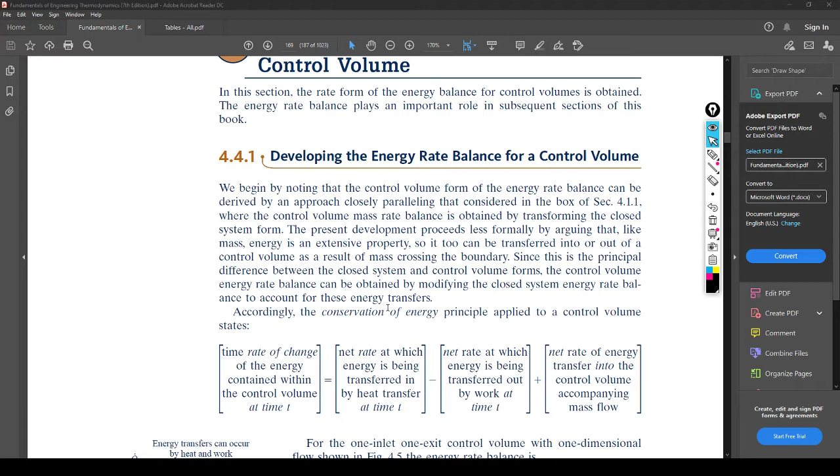So it says, we begin by noting that the control volume form of the energy balance can be derived by an approach closely paralleling that considered in the box of section 4.1.1, where the control volume mass rate balance is obtained by transforming the closed system form. So essentially what it's saying is that we are transforming the original one, Q minus W is equal to the delta, the change in energy, right? That equation that we have worked with before. So I'll just write that out if I can.

Q minus W, so the heat transfer minus the work has to be equal to essentially the change of energy, right? But the change of energy, if you guys remember, breaks down into kinetic, potential and internal energy, right? It's the exact same for this chapter as well. Except that in this chapter, because we have a control volume, not in many cases do you have to deal with potential and kinetic energy, but there are times when it is added. And in control volumes, you'll see it more often than in closed systems.

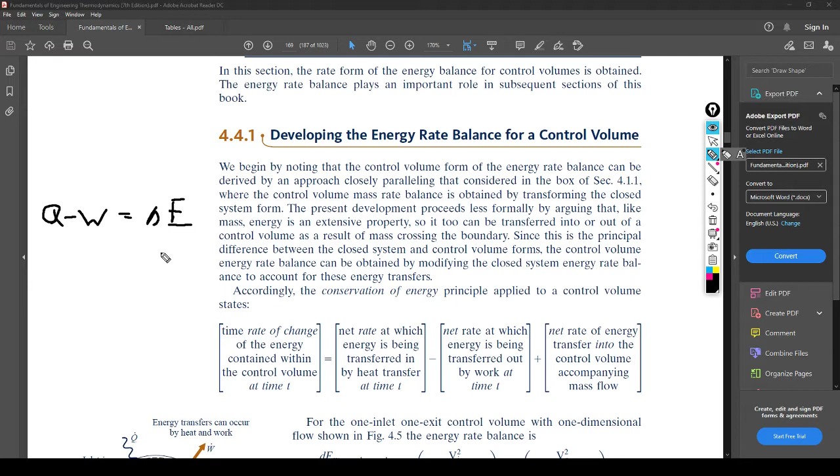So remember, inside of this delta E is the change of internal energy, the change of potential energy, and kinetic energy, right? And we'll show that equation in just a second, the full one. So let's read this part.

It says the present development proceeds less formally by arguing that, like mass, energy is an extensive property, so it too can be transferred into or out of a control volume as a result of mass crossing the boundary. Since this is the principal difference between a closed system and a control volume, the control volume energy rate balance can be obtained by modifying the closed system energy rate balance to account for these energy transfers. Accordingly, the conservation of energy principle applied to a control volume states this.

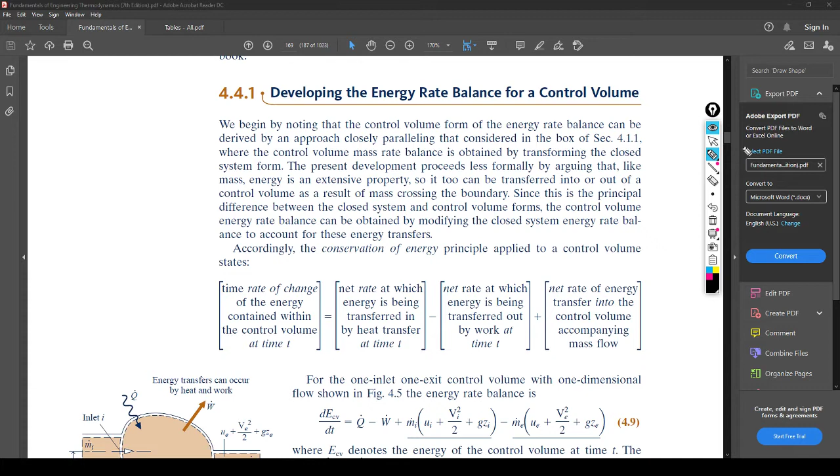This is in words. The time rate of change of the energy contained within the control volume at time t has to be equal to the net rate at which energy is being transferred in by heat at time t minus the net rate at which energy is transferred out by work at time t plus the net rate of energy transferred into the control volume accompanying mass flow. And so right here, this is what it ends up coming down to. This is the equation in actual variable form, okay?

So we have the change in the energy of the control volume with time is equal to Q dot, because remember dot means we have a rate, there is time involved, so Q dot minus W dot plus mass flow rate of the inlet times the internal energy of the inlet plus the velocity squared over 2 of the inlet plus the potential energy of the inlet.

So really fast, just to make sure everybody's aware, this right here is the internal energy, right? This right here represents the kinetic energy. And the last one is potential. So this right here is each part, internal energy, kinetic, and potential, that I mentioned earlier. It is velocity, and then gz. So g is gravity, and z is height. This is the height of the inlet.

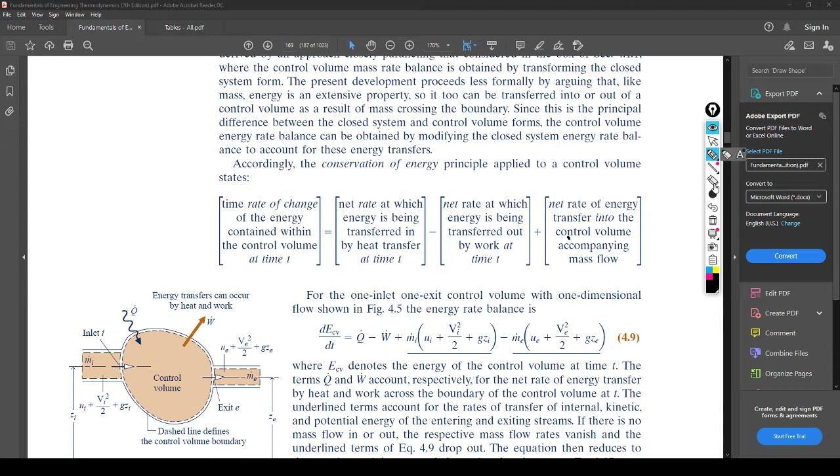All right, so right here, let me go ahead and get this out of the way. So it says, the underlined terms account for the rate transfer of internal, kinetic, and potential energy of the entering and exiting stream. So that is these things right here. If there is no mass flow in or out, the respective mass flow rates vanish and the underlined terms drop out. The equation then reduces to the rate form energy balance for closed systems.

So essentially, what it has said is that if there is no mass flowing, this is essentially just an internal energy. This is a closed system question, because remember, the change in internal energy, or the change in energy, will then be equal to Q minus W. This stuff will all be gone. So if you get rid of the mass flow rates, it goes back to being a closed system where there is no mass flow rate, right?

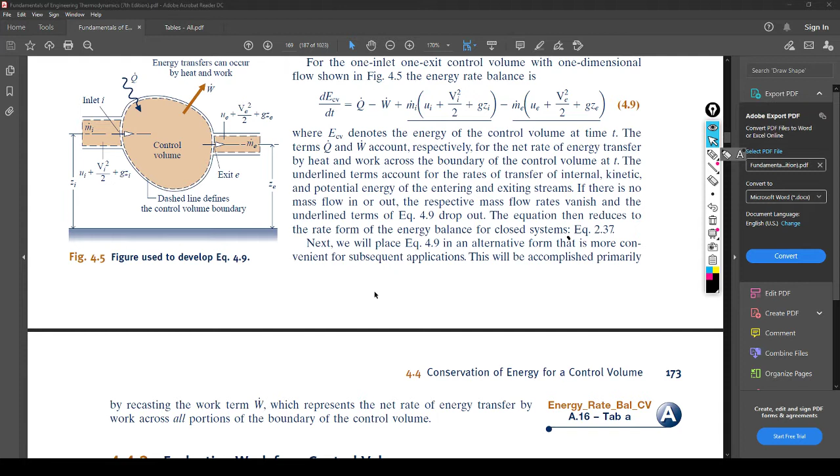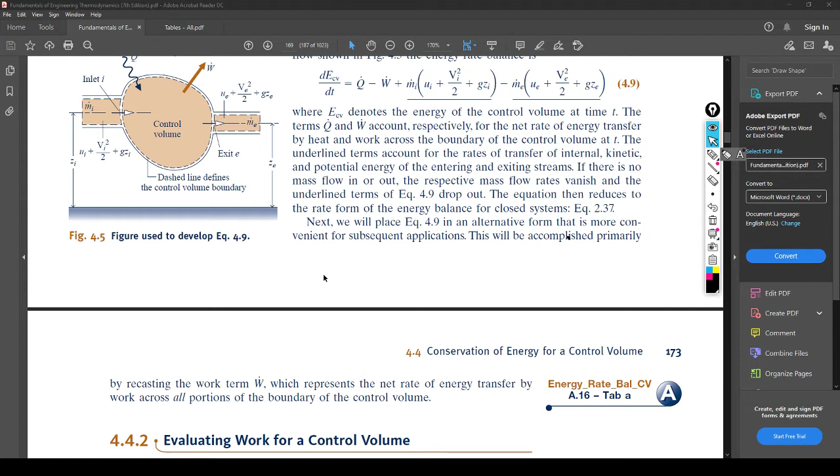So it makes sense. Then it says, next, we'll place equation 4.9 in an alternative form that is more convenient for subsequent applications. This will be accomplished primarily by recasting the work term W dot, which represents the net rate of energy transferred by work across all portions of the boundary of the control volume. So let's talk about that in just a second.

So it says, because work is always done on or by a control volume where the matter flows across the boundary, it is convenient to separate the work term W dot of equation 4.9 into two contributions. One contribution is the work associated with the fluid pressure as mass is introduced at the inlets and removed at the outlets. The other contribution, noted by W CV, includes all other work effects, such as those associated with rotating shafts, displacement of the boundary, electrical things, right? So essentially, inside of the work term, there are two things, and we are going to talk about how we break that down in just a second.

So it says, consider the work at an exit, E, associated with the pressure of the flowing matter. Recall from equation 2.13 that the rate of energy transferred by work can be expressed as the product of a force and velocity at the point of application of the force. Accordingly, the rate at which work is done at the exit by the normal force due to the pressure is the product of the normal force, PE AE, and the fluid velocity VE. So right here, the time rate of energy transferred by work from the control volume at exit E is this right here, okay? Where PE is the pressure, A is the area, and V is velocity.

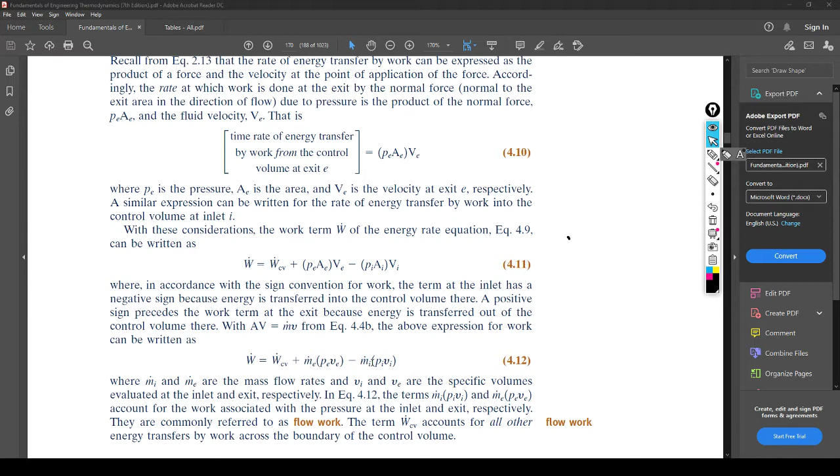So it says, where in accordance with the sign convention for the work, the term at the inlet has a negative sign because energy is transferred into the control volume there. A positive sign precedes the work term at the exit because the energy is transferred out of the control volume there. With AV equal to m dot v from equation 4.4b, the above expression for work can be written as this. So AV, if you guys remember, we've talked about this. This mass flow rate is equal to AV over specific volume. So if you essentially make that substitution here, you will get W CV plus m dot E PE vE minus m dot I PI vI. So they just made a little substitution here. And this is going to change in just a second to something way better.

So it says, where m dot I and m dot E are the mass flow rates and vI and vE are the specific volumes at the inlet and exit. In equation 4.12, the terms m dot I PI vI and m dot E PE vE account for the work associated with the pressure at the inlet and the exit respectively. They are commonly referred to as flow work.

The term WCV accounts for all other energy transfers by work across the boundary. So, just as a little bit of a recap and to break it down, this part is like a shaft, a piston, electrical, something like this. This is something being input in like a mechanical form, right? There's some sort of shaft going on, there's something.

The other part here is generally referred to as, they call it flow work, but this right here is the work of the fluid. Just to distinguish those two: one of them is a shaft, the other one is just essentially pressure differences and volume differences from the inlet to the outlet. Okay? Now, this right here is about to reduce to something that's extremely helpful to us. I've mentioned it previously in other chapters, but today we'll go over it again.

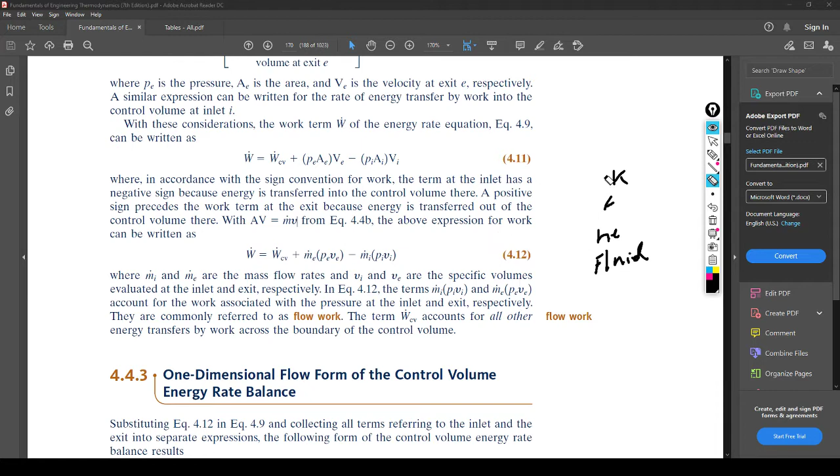So, where do we go from there? Right here, we go to the one-dimensional flow form of the control volume energy rate balance, okay? We've already seen this equation, except that now we have the PiVi and PeVe added to the equation. So what that accounts for is that this is the mass flow rate times the internal energy.

So this right here is internal energy. This right here is the flow work. This right here, kinetic energy, and the last one is potential energy, right? Same as the other one over here. And so, we have now changed the equation just a little bit, but this is where it all comes into play.

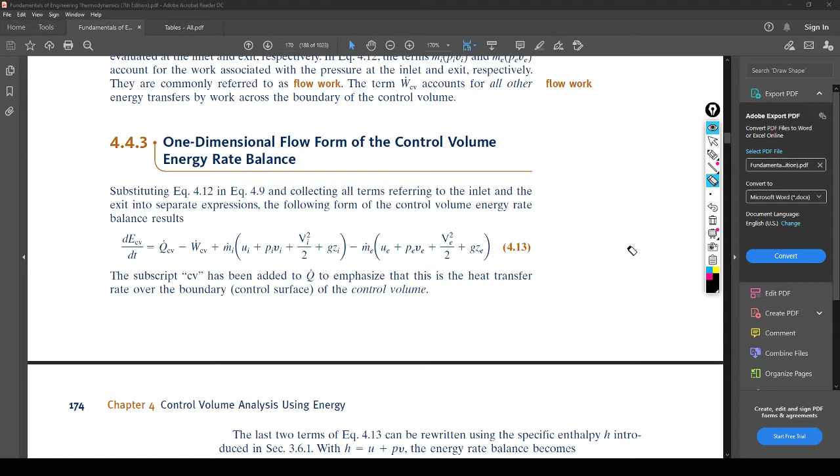So right here, the last two terms of equation 4.13 can be rewritten using the specific enthalpy h introduced in section 3.6.1, where, if you guys recall, h was equal to u plus pv, right? And I mentioned back then that enthalpy is used in open systems and for closed systems it's internal energy. So this is now an open system, and the reason why we can use it and simplify this is because of what h is equal to. Let me write this out.

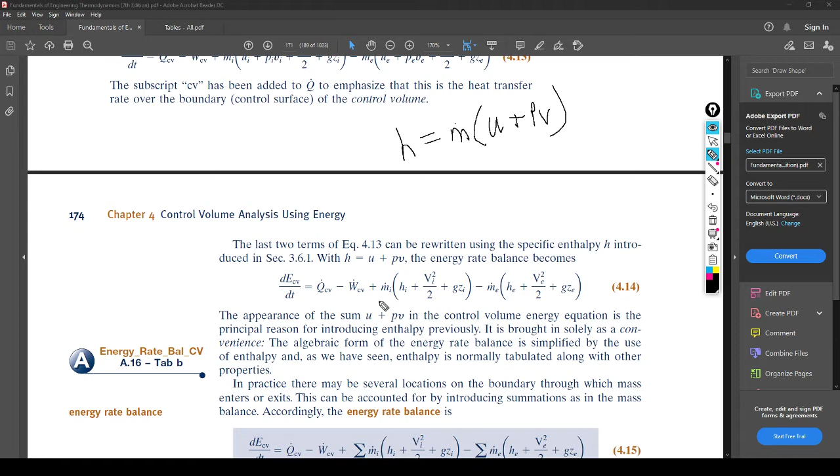So how this is going to break down is H is going to be equal to mu plus pv, right? So if anyone looks at this equation, not this one, the previous one, what do we have here? We have mi ui and mi pi vi. We have this exact setup inside of the equation, which means that we can remove the ui and the pi vi, and we can replace enthalpy into there.

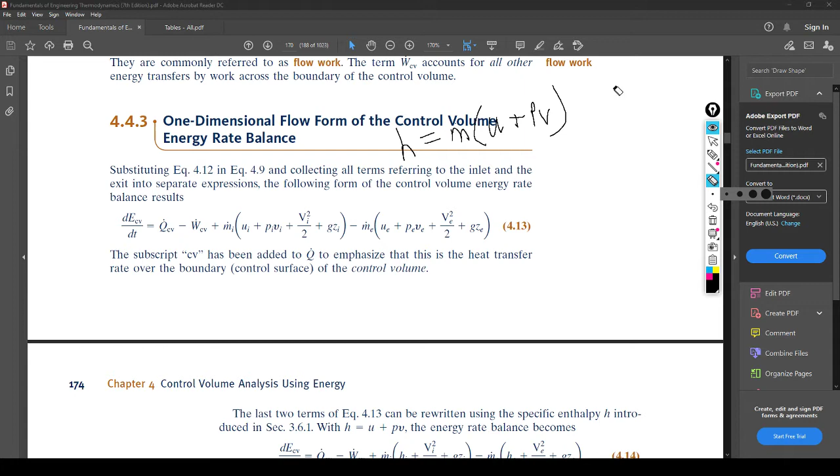And you guys probably remember that enthalpy is in the tables, right? So that is what we can do. Instead of getting internal energy for questions like this, we get enthalpy, okay? So enthalpy: open systems, control volumes. Internal energy is used for closed systems, like the ones we did in the previous chapter. So, now that we can do that, let's see what the equation turns into.

So right here, we have the change in energy of the control volume with respect to time is equal to QCV minus WCV plus mi hi. This is once again still kinetic and potential. And this right here is the energy and the work of the fluid, because if you remember, h is equal to the internal energy of the fluid plus the work of the fluid. So this term h essentially encompasses all the things we want to know about this, and it reduces the equation in a very interesting way.

And the reason why enthalpy was created was because of this. You remember when I told you about enthalpy? I said that whenever they were doing their analysis on thermodynamics, they found that u plus pv showed up all the time, and so they were like, I don't want to keep having to write u plus pv and calculate that. So let's just make it a new thing, call it h for enthalpy. It showed up too much, and they eventually just created a whole table entry for it.

So does everybody understand that so far? How that worked, how we made that switch?

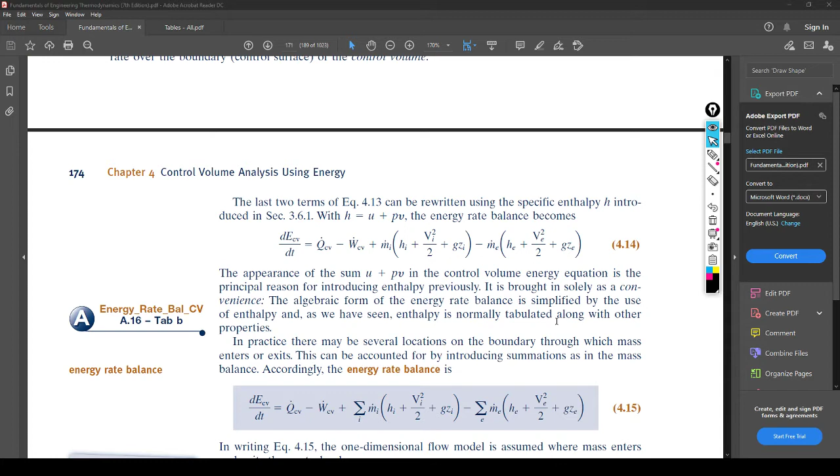In practice, there may be several locations on the boundary through which mass enters or exits. This can be accounted for by summations as in the mass balance. So, if there are more than one entrance and exit, you guys probably know that you use the summation sign, and you would sum all entrances, and you'd also sum all exits, right?

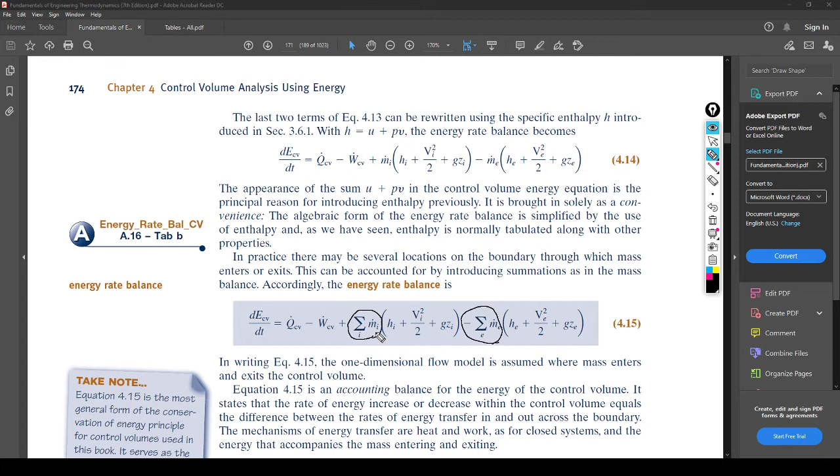So for the question we did last time in this class, there would be two entrances, so it would be mass flow rate of one entrance times h of the entrance plus V of the entrance plus gz of the entrance. Then you do it again for the other entrance, and then you would finally subtract off the exit one, because there were two entrances, one exit. All right.

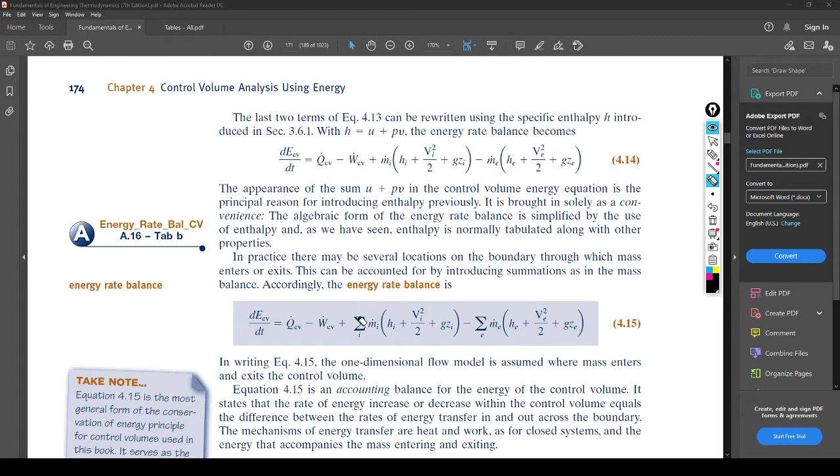So it says, in equation 4.15, the one-dimensional flow model is assumed where mass enters and exits the control volume. And equation 4.15 is an accounting balance for the energy of the control volume. It states that the rate of energy increase or decrease within the control volume equals the difference between the rates of energy transfer in and out across the boundary. The mechanisms of energy transfer are heat and work as for closed systems, and the energy that accompanies the mass entering and exiting. All right.

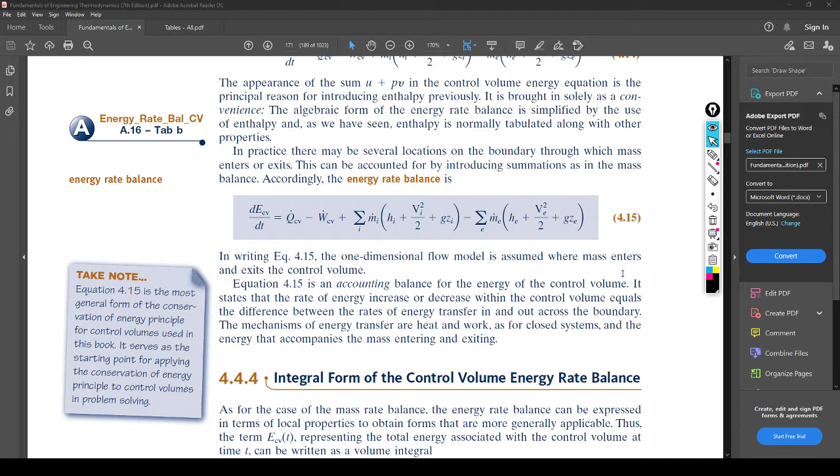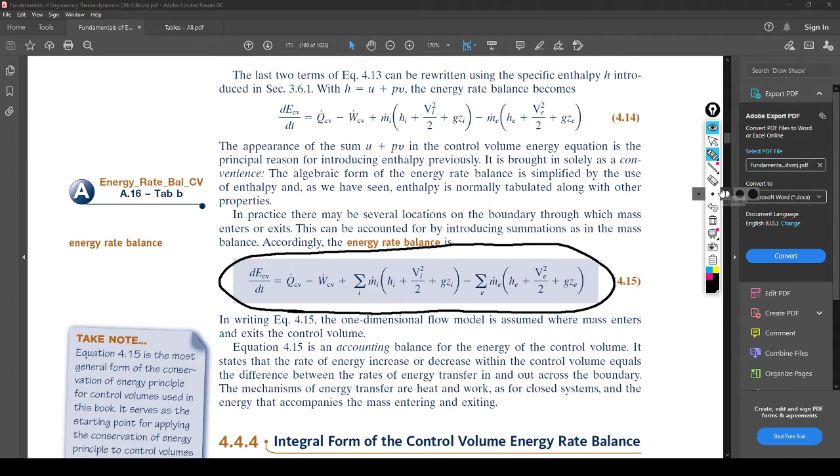We're not going to go over the integral form because I think the integral form just confuses the hell out of people. So there's no reason to do this. What you guys need to know is this right here. And if there's only one entrance, one exit, then this reduces, right? There's no need for summations. But you guys understand that this right here is the main part of the equation that we need. So we are no longer using internal energy. We'll make that clear. We now have H here. All right.

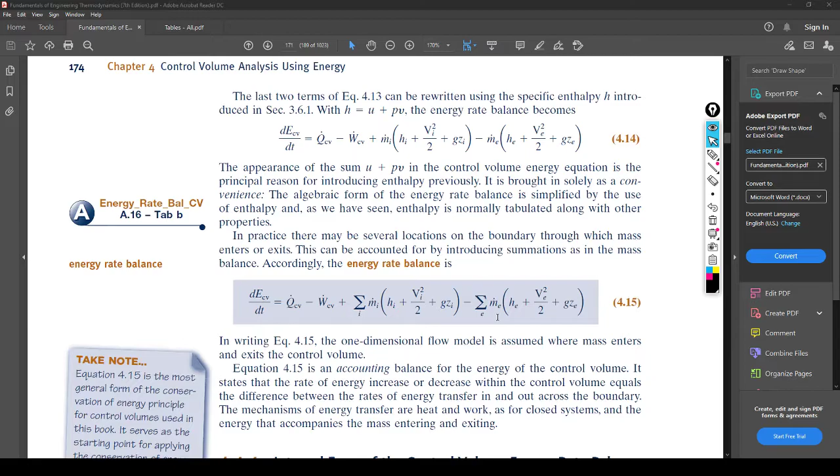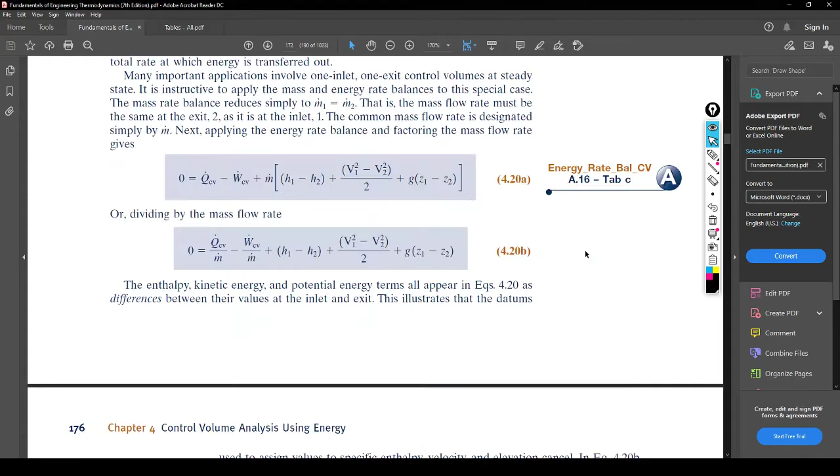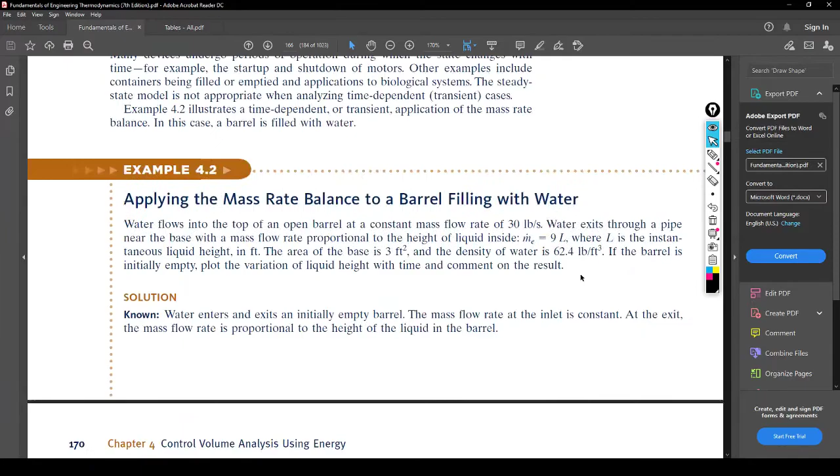So we're going to pick a question now. We're going to do another question really fast. I'm going to go find one. I'm trying to figure out some of the things that, yeah, okay, so they do talk about it later, but it's really weird because it says on his notes that 4.33 shows the parts that I want to show, but it's not here. So I'm really confused as to that. But really fast, I guess I can go ahead and draw some of these things. So I'll open up Paint and we'll start a question, but first I'll draw some of these.

So some of the things that we're going to see in this class as we move along are these mechanisms, or these processes, I guess is a better way. So for the first one, I'll just draw it up here. Oh man, big letters. So the first one up here is a turbine, right? So the first one is a turbine.

A turbine in this class generally looks like, although this is going to be bad. You guys will probably make fun of me. Let's just use the spline tool. Nope, that didn't work how I wanted it. Never mind. So let's do this. They generally look like, whoa, okay, they don't look like that. Yeah, they generally look like this.

So this right here is a turbine, and so if you ever see this on a schematic or a process that I have in the homework, this is what a turbine is. And it will tell you that it's a turbine, but this is a turbine. The compressor is the inverse of this, so it's with this part facing over here. So it's just the flip of that.

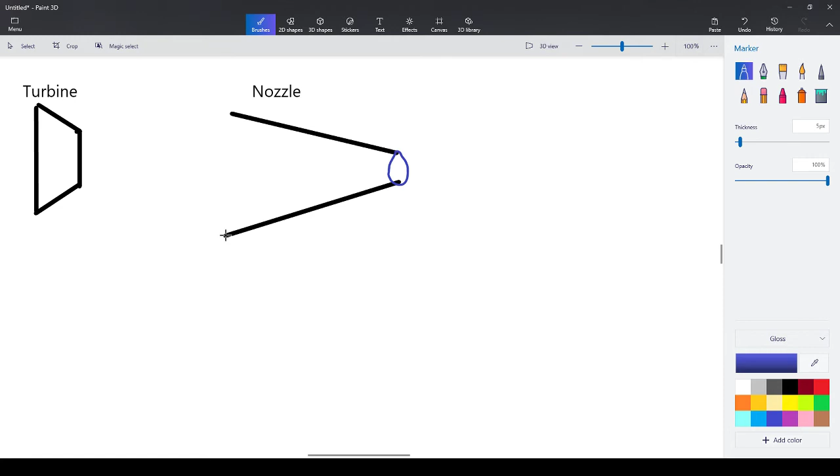Right? And so right here, we would have state 1 and state 2, right? So before the nozzle, it is out here, because obviously I think you guys know what a nozzle does. If you don't know what a nozzle is, I just saw what you wrote. So if you want to see a nozzle, this is what it looks like.

And so the first stage, nozzles, like I said, all they do is they increase the velocity on the exit, right? That's their goal. It's what you put on your hose. It's what is used in jets for how you fly. Jet engines have nozzles because the speed difference on either side is how you move, create thrust. So this right here is a nozzle in our class.

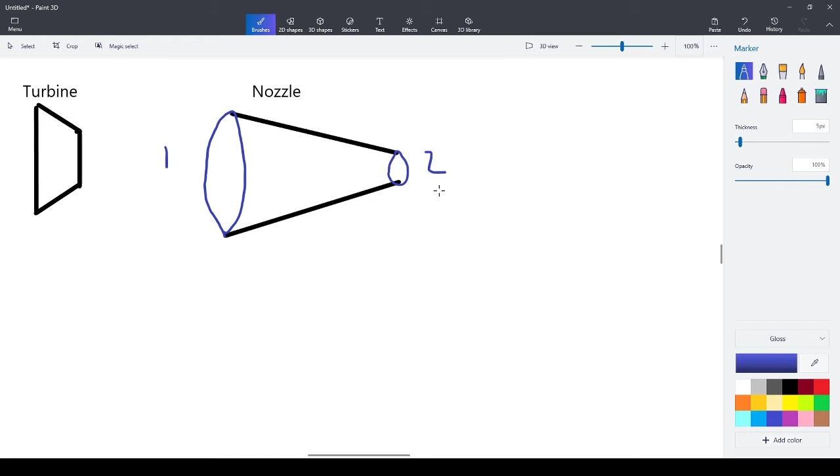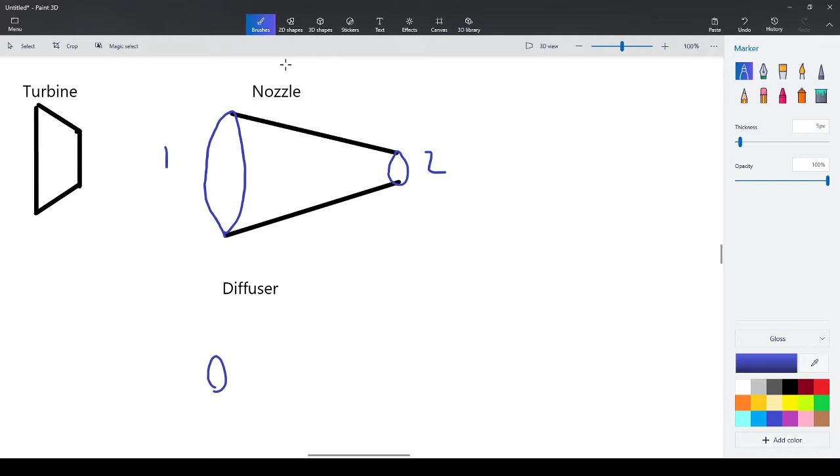The diffuser is the inverse of this. So that means it starts really small and then gets really big at the end. So I can draw that as well, but I think you guys probably can use your imagination here. And it's a diffuser. I hope I spelled that right. Somebody fact check me. So then we have the diffuser, which starts off small and then branches out.

I don't know why it keeps doing that. Yeah, that is aggravating, but that's okay. It's Wednesday, guys, and we're crushing it.

So, this right here would be state 1, and this would be state 2 for a diffuser. And so, there are differences we have here in how these things operate. So I'll make the compressor one over here just so we can show basically all of them. I'm pretty sure that's all the ones that you guys will run into. So let's do compressor. Now, before I say that, there are other ones like heat transfer ones, like the one we just did the other day where it's 2 fluids enter, 1 fluid leave. It's Thunderdome essentially, right?

That one is there as well, but it's just a heat transfer process, so it's not so much different than other things that you've seen. All right, and so the compressor, like I said, is the inverse of this one, so it would be short side over here. Although, once again, you can always tell which one it is just by which way the work is. So if the work is in or out, you can always tell. But this is how I've always seen them and drawn them, so I'll just keep passing down the knowledge, probably doing it wrong.

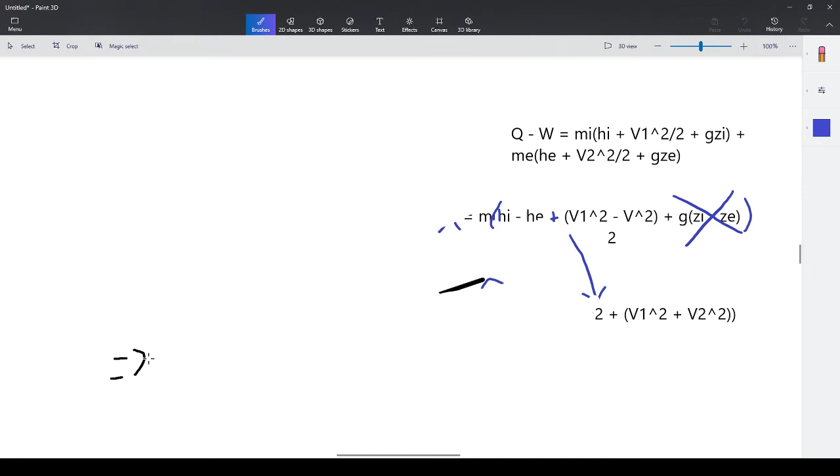But real fast, these things all sort of break down, and I'm going to go ahead and get a question going. Let's get all this out of the way. I'm going to do one real fast. We were a little bit ahead of the game. I think we did a little more than what we were supposed to last time. Oh, that's right, that's my other marker. All right. So let's see if I can find one of these questions really fast for us. And then there's heat exchangers, which is basically like the one we did last time.

Let me see. Yeah, we already did one like this. I don't really want to do that. So let's see if I can find a nozzle one. So 4.32 in the 8th edition. I will pull that up really fast. Give me a second.

I have to go walk a long distance to grab my book. It's a live show, gentlemen. Alright. Apologies. This will be the reason why I don't get hired back. They're like, wait a minute, you had to get up during your lecture? By the way, if this is the only reason why I don't get hired back, I consider myself lucky.

So, let's move in here. 4.32. It says, steam enters a well-insulated nozzle at 300 psi and 600 Fahrenheit. So, once again, guys, you start with what you know. So let's write that up here. We have steam, so that's our fluid. It says enters a well-insulated nozzle, so Q is 0, at a pressure 1 of 300 psi. All right?

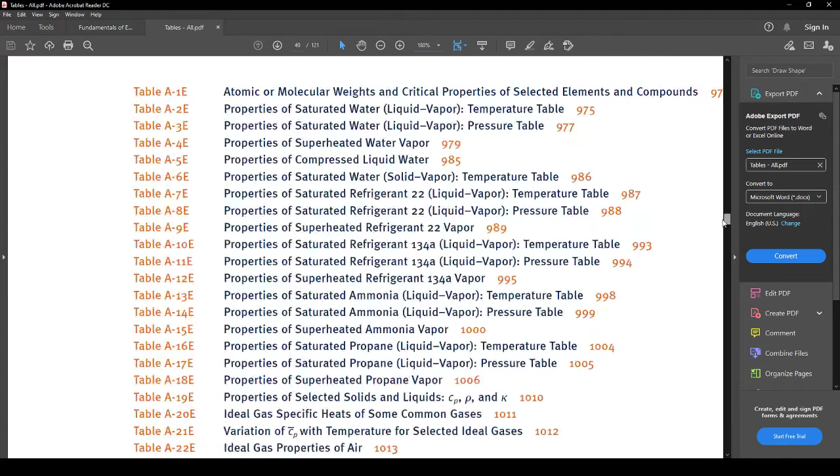So we know P1 is equal to 300 psi. T1 is equal to 600. So I can already tell you that this is going to be definitely superheated, pretty sure. But we need to go and look anyway. Let's go look at the tables, and we need to go to the English units. So way, way down, right here somewhere. So I always go to the pressure table when I have the chance. So we need to go to 300 psi, which is right here, and we are at a temperature of 600 degrees Fahrenheit.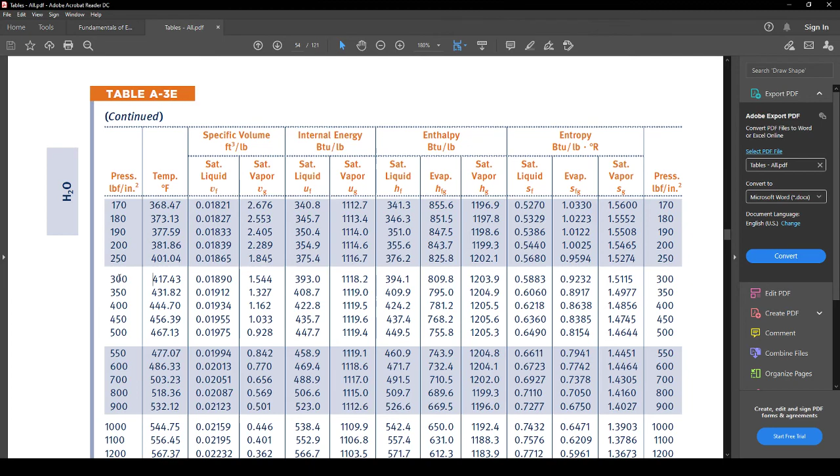We are almost 200 degrees above that. So we are superheated right now. Right? Does everybody understand how I did that? Does that make sense? So, 300 psi, we are above this. So we need to go to the superheated tables. So let's go to 300 psi.

300 psi is right here. Now let's go to 600. So remember though, we need to grab enthalpy, not internal energy. Enthalpy is the third column over. So down here, slide across. Now you can grab whatever you think is useful here. If you want specific volume, that's also fine. But I'm going to take enthalpy here, which is 1314.5.

So, using the tables, we have found H1 is equal to 1314.5, and this is kilojoules per kilogram. Right? So we now have that, which means I can go ahead and mark this off. So if we have all of these things, we now need to just know this last one. So it makes sense that we could probably maneuver this equation to get that by itself, right? Does everybody agree with that? So how are we going to do it? Well, you gotta multiply everything out, unfortunately.

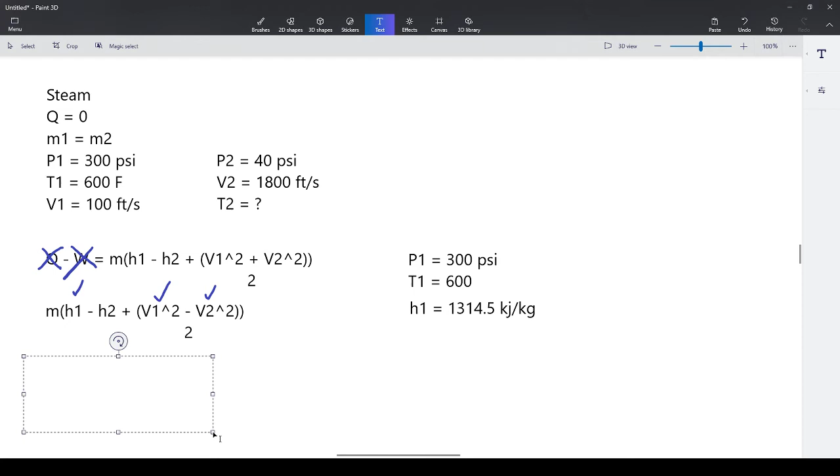So I'm gonna do M1 H1 minus M1 H2 plus M1 times V1 squared minus V2 squared, and then divided by 2. Right? So I've multiplied the M through all of these things, and we're left with this. Then you move H2 over to the other side. Then we can divide over M1. So we are left with the following.

I think you would be left with H2 is equal to M1 H1 plus the difference of these two right here. Let me see, you move this to the other side. Yeah, so the M goes away. If you divide the M1 over, you'll get rid of the M's on this side. So it should be H2 equals H1 plus V1 squared plus V2 squared over 2. So that is where we are at right now.

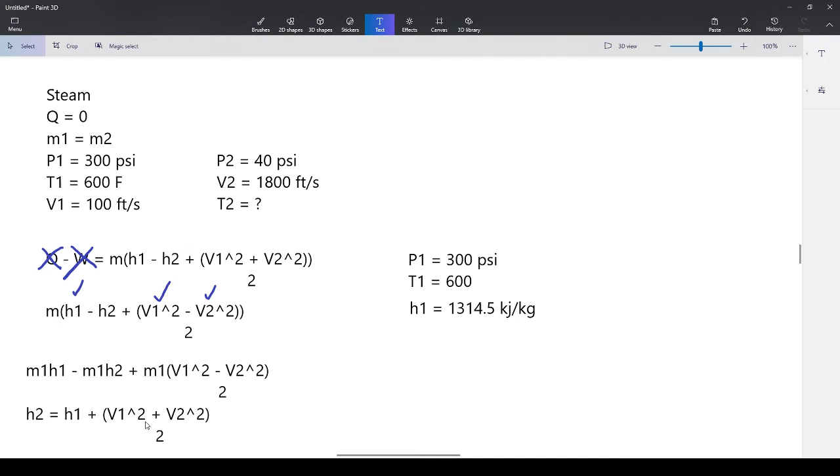So really fast, there is a problem though. There's a slight issue, and the slight issue is that these velocity units are not in terms of what we want them to be. They are in feet per second, right? Does everybody understand that? So that means we have to change things. Give me a second. By changing them, we have to mess with these units. Remember, this right here is in BTUs per pound. We need to change this to BTUs per pound.

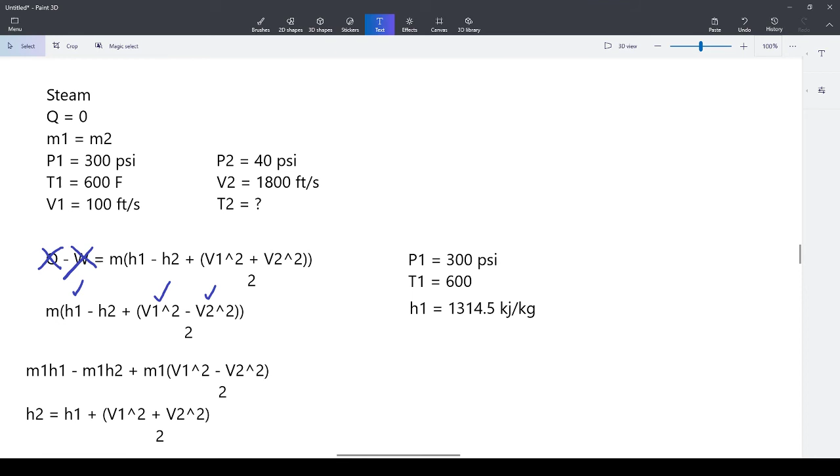The English units actually are really bad for this, and I'm sorry that I picked an English units question. But let me find this one just to be sure that I get it right. Oh my god, this is terrible. I remember this now. You have to change the units: you have to turn this into foot pounds per second squared, and then 32.2 pound foot per second squared is 1 pound force, and then 778 foot pound force is equal to 1 BTU. It's a really long one. I'll just write it out. But we are almost out of time. We might finish this next time.

But essentially, you do H2 is equal to H1 plus this quantity in here, so V1 squared plus V2 squared divided by 2, as I said before. Then the last part: since we have feet squared per second squared, you have to use 1 pound force. This is the conversion, I'm going to write it over here. 1 pound force is equal to 32.2 pound foot per second squared. So the second squareds cancel, which is good. And then 1 BTU is equal to 778 foot pound force. Like I said, I'm sad to say that this is how it is.

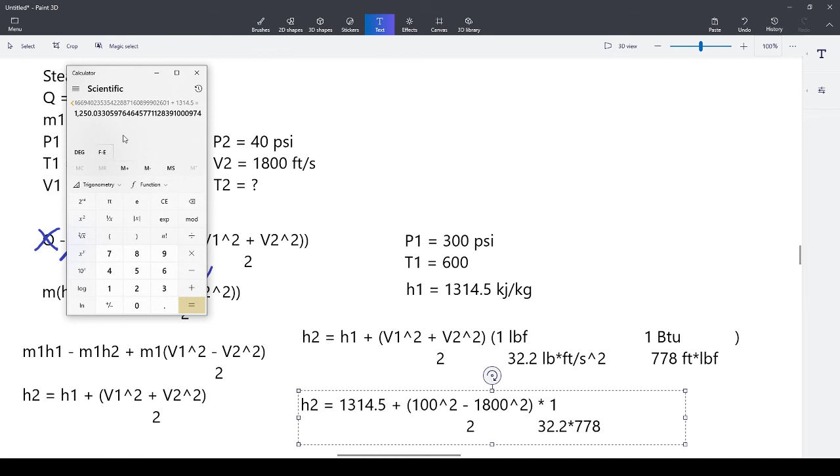1314.5. So you get an enthalpy value at the end of this: 1250. And so you can go look up 1250 enthalpy at the pressure of 40 psi, which I will do really quick just to show you. So let's go look at this. What psi did I say? 40. So 40 psi here.

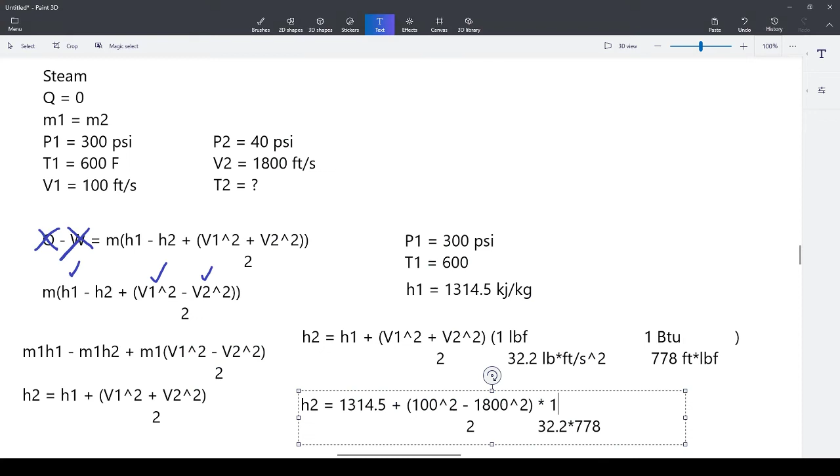So we are still superheated because this is the enthalpy of saturated vapor, but not by much. So we actually came down in energy, which makes sense. Now we go to the superheated tables at 40 psi and find our enthalpy, which was 1250. So it's between 400 and 500, fairly close to right in between. So we could say 450 is our temperature, something like that, at 40 psi.

I'm going to see if that's the right answer, although this is the 6th edition, and I don't have the 6th edition in front of me. Yeah, here it is. I found it. I'm pretty sure it will be right, unless I made a weird calculator error. Apologies, this has taken too long, because I don't have the 6th edition solutions on this computer. Alright, let's see what we got here.

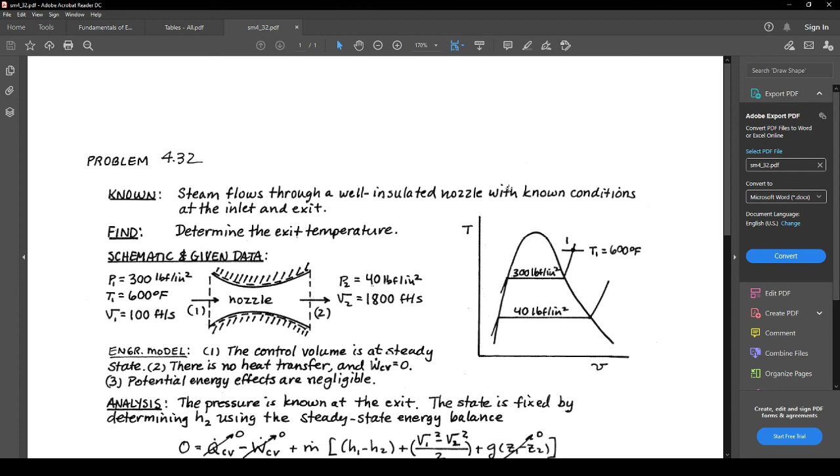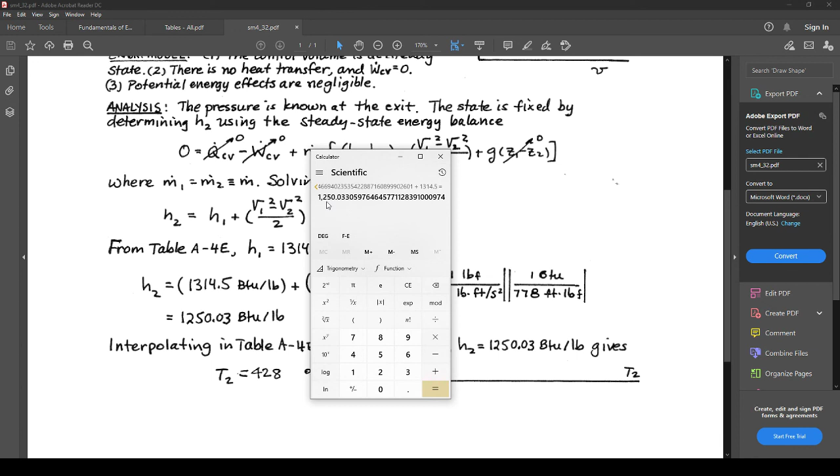1250.03, 428 they say. So our number was 1250.03, and they say 428 from the tables. Did I just read that wrong? Oh, yeah, I guess I did. They interpolated between these values, so it was closer to this one than the other one. So 428 is what they say the answer is. Once again, sorry that took so long.

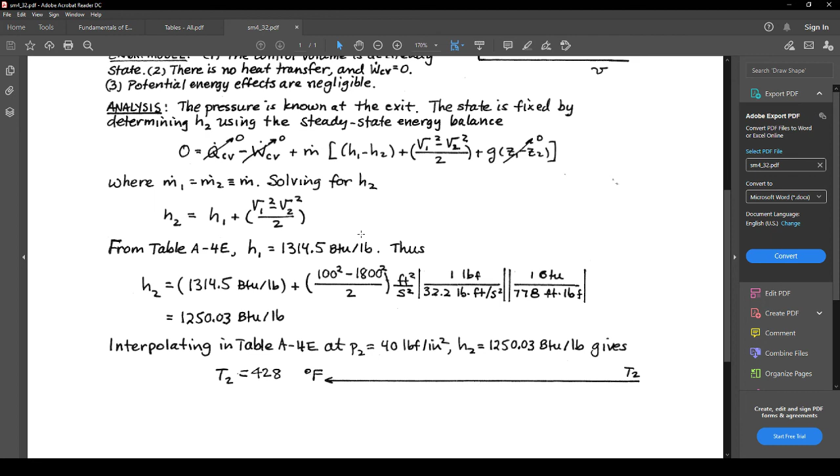But this is the type of question. There is a question on your homework just like this. It is a nozzle, and then you also have a diffuser, and a turbine with multiple inlets and outlets. And the last question is a change of height. It has a potential energy effect, so you guys have to work on that.

The homework has been uploaded today. I apologize for not doing it earlier, so I've given you until next Wednesday to do it. You have a full week from today. So you guys are free to go. Hopefully this made some sort of sense.